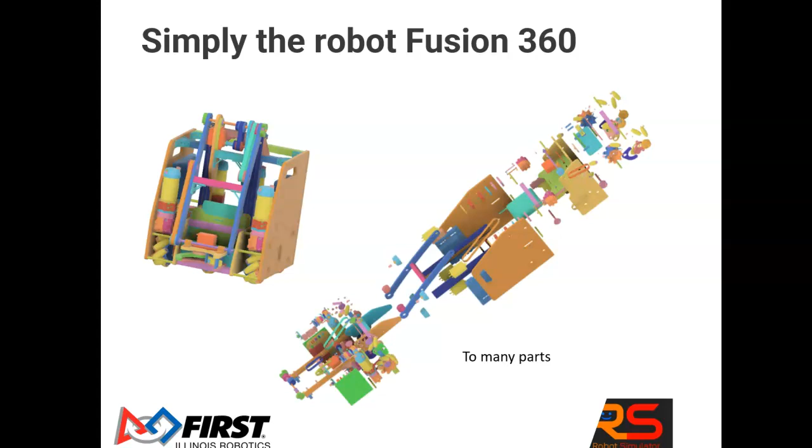Now we have to simplify the robot. There's way too many parts for the Unity animation to work effectively, so we have to reduce those. It starts like this and ends like that, and we hold the robot together with Unity magic, not screws. Then we need to test the joints in Fusion to make sure everything works. There's an example of testing the joints in that video below.

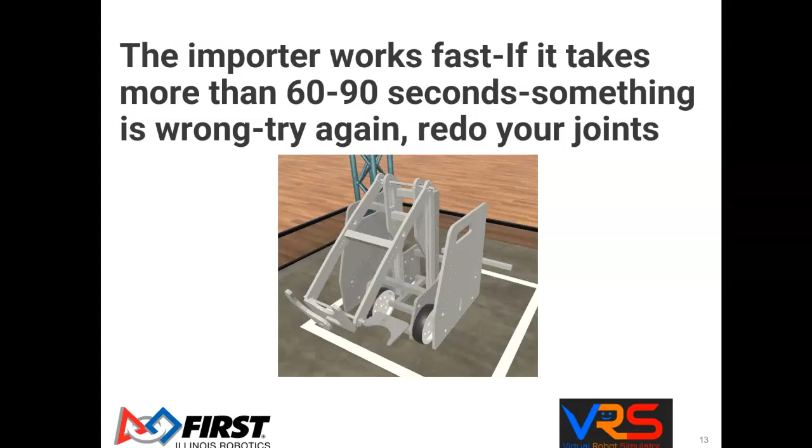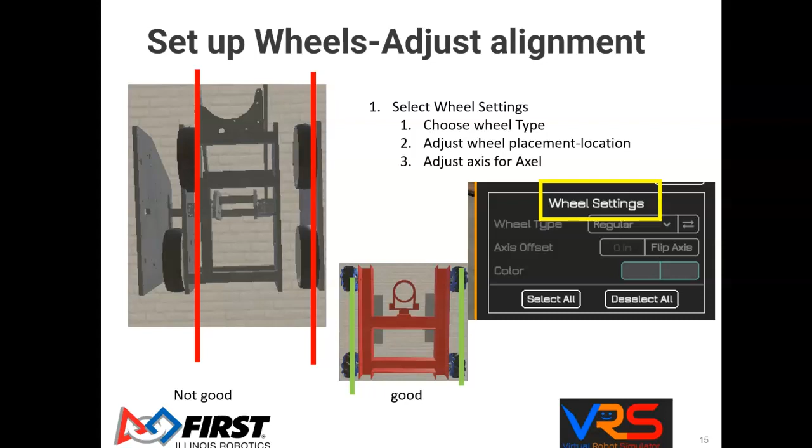And the importer works fast. If it takes more than 60 to 90 seconds, something's wrong. You have to simplify, redo your joints. Set up the robot. Pick a color, pick a number, adjust the wheel types. Make sure your wheels are aligned like they are in the green. You can do different settings for the axis offset.

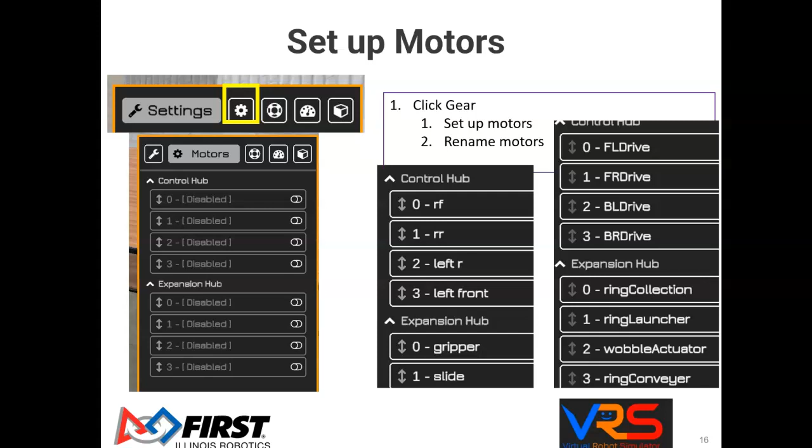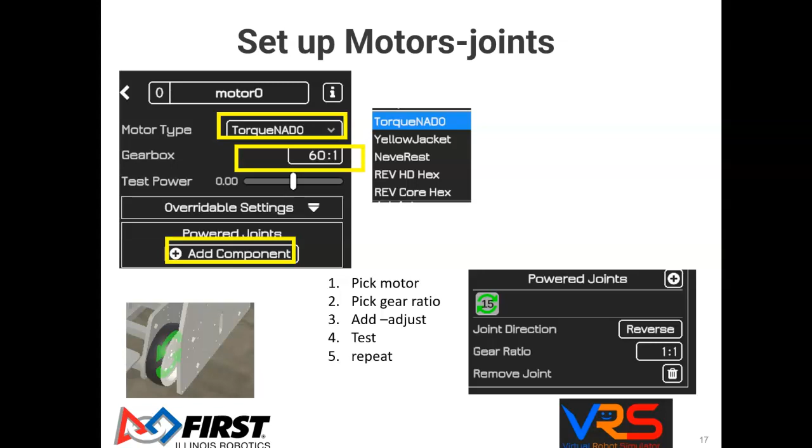Identify motors. Click the motors, set up the motors, rename the motors. So here's one option for motor names. Here's another option for motor names. And then, of course, we're going to set up the motors. We're going to give the different kinds of motors, the different ratios, and we're going to identify the joints. Some joints have limits, so we have limits in there and ratios.

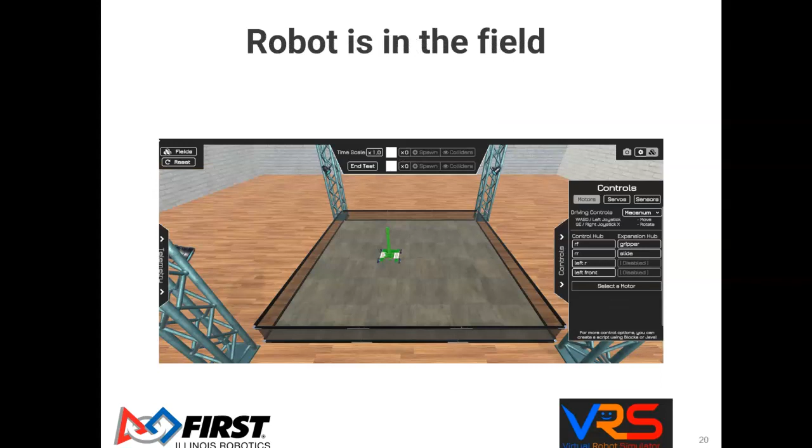Now you're ready to test your robot. Choose the field, choose the driving controls, and your robot gets imported. Now we choose the field, and the robot can be in 3 different fields.